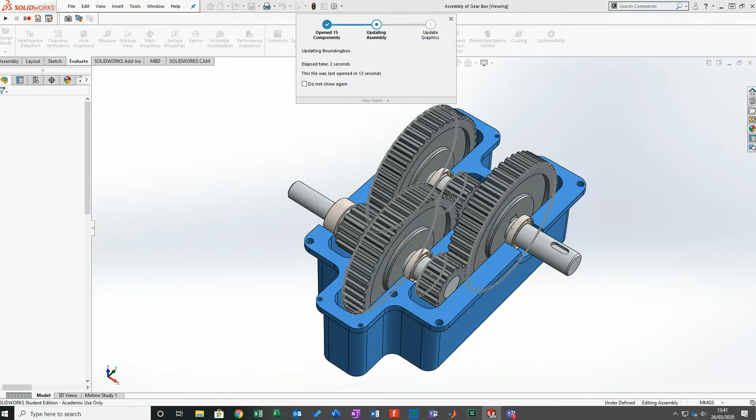It's just so you know the model's there. What I'm going to do is open this model. I'm going to show you this gearbox - it looks worse than what it is, so let's just take a look at it. It's one I saw this morning, and I thought, yeah, it's not bad, it's actually a decent example. There's a few bits that I kind of thought, oh no.

So first things first, what I personally do with these, and what I did this morning, was look at it - we have the bearings. Obviously with bearings I'm going to drop all my bearings off because I don't really need them, so I'm going to hide that.

Then we've got the housing. We can stick the housing in afterwards if you want, but it would only ever be for aesthetics. So what we've got now is the basics of this system.

We've got just the gears, we've got the keyways, but you'll notice the shafts have a way of interfacing with it. What I'm going to do is build each one up, and we're going to have to essentially tell the system that these two parts are not one part - they're actually two parts working together in a single assembly.

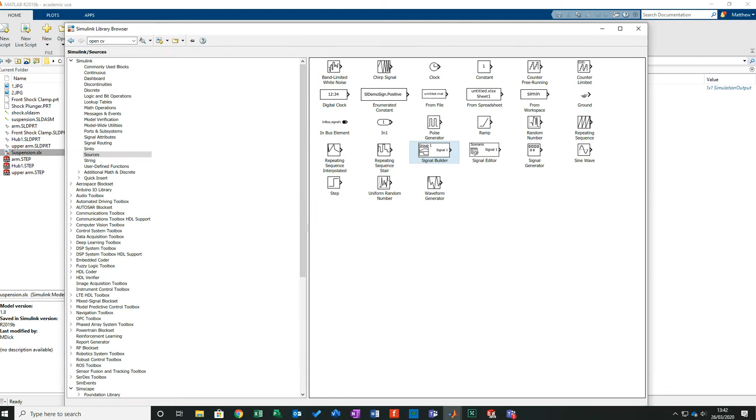So first things first, I'm just going to come out here and pop that there for a second. I'm not going to give you that one just yet. Like I said, I was working through this morning, and I think I've come up with a nice little way of delivering this to make everyone's lives so much easier.

I hope so anyway - you will become an ultimate expert at rigid transforms by the end of this, I promise you that. So I've got the gears, everything's all in here. All these lower steps we've actually got already. I'll explain where the PCDs have come from, and by the end of this I'll upload everything here so you can have a play around and see what you think. But these gears are really useful - I found some fascinating things this morning actually.

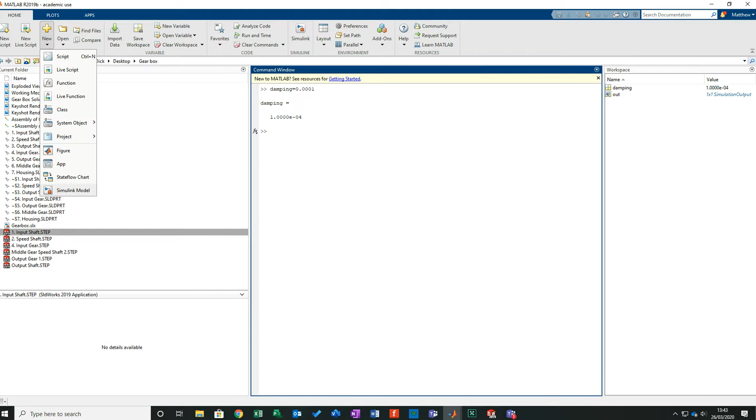What we'll do is start a new one, so we're into a new part. Again, if you're after these models and want to follow me, you're more than welcome to download the parts. So I'm going to go as normal, library browser, scroll down, and all I'm going to do at the minute is start my world. Let's go on to there - start my world. So I'm going to go to Utilities, and as ever we need a solver. I'm going to go to Frames and Transforms, and bring in a World. As ever, this becomes our base construction area.

Coming back up on the SolidWorks model, I'm just using this as a map really, just for me to see what's going on. I'm going to start - if I click on here, this is my output shaft. I'll probably start on the output shaft, because in my example I thought I'd spin up the output shaft to see what input will be needed to get a value I'm actually creating here. Thought it was just something different - we can do it the other way around if you wish, but this allows me to do that.

And then what I can do is look at what happens if these gears become jammed, if they've got mass levels of drag on them, if there are major issues coming out of these - we can do all sorts. So that's what we'll do, and let's pretend for this example that we're looking to try and find any abnormalities that occur.

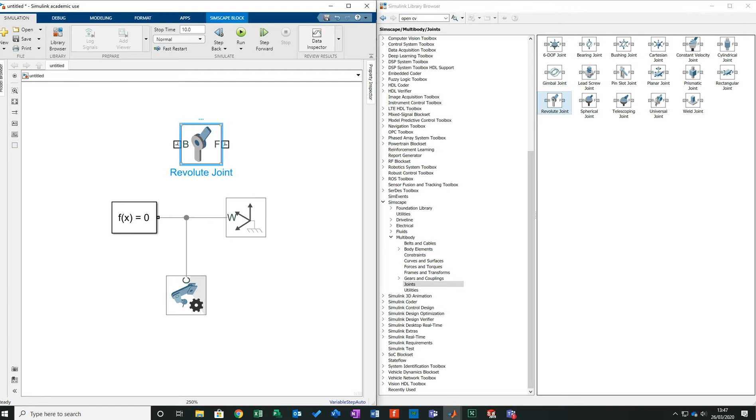I'm going to drag and drop a Revolute joint, and we're going to start with our output shaft. Snap that in.

What I'm going to do is build to there. So I'm going to go to... where are we... bodies, and I'm going to bring in a solid. Then what I'm going to do is bring in that output shaft. Double click into the output shaft.

And what we're looking for is the slot and the keyway. There we go, that's our output shaft. We need to see that there are differences, because don't forget we're going to bring these parts in for the first time all the same colour, and they're going to be swallowed up. We need to be sure that we're looking at the right stuff. So I'm going to decide all my shafts will be blue.

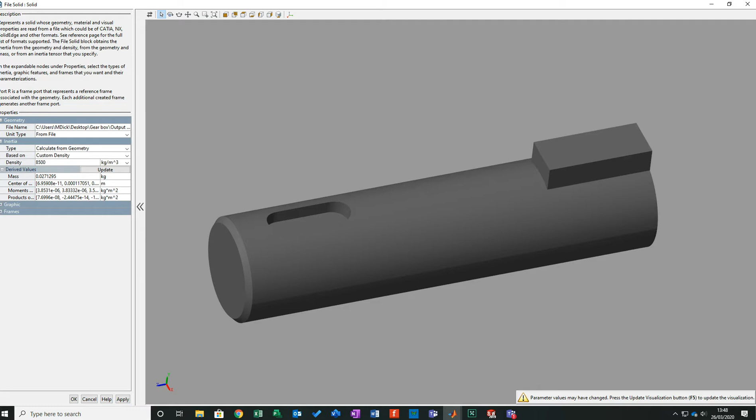My inertia - sorry, I'll go custom density, and I'm going to go 8,500, not 85,000. And then go graphics, and I'm going to change that to blue. Any blue will do, it's just to have that difference.

And I want to look at my reference points, look at my frames. You'll notice that on the keyway it actually does have a point already. What I'm going to do is select the end face and create myself a point there as well, because that'll allow me to give a point, an origin, a reference to start building from. So I'm going to go frames, add in the frame, and we'll go main or something like that. It just gives me a point to begin my referencing.

So I go select. Because the way that the guy has drawn this, he's actually done a pretty good job - to be fair, he would pass in his assignment. If I click save, and then apply, and then OK.

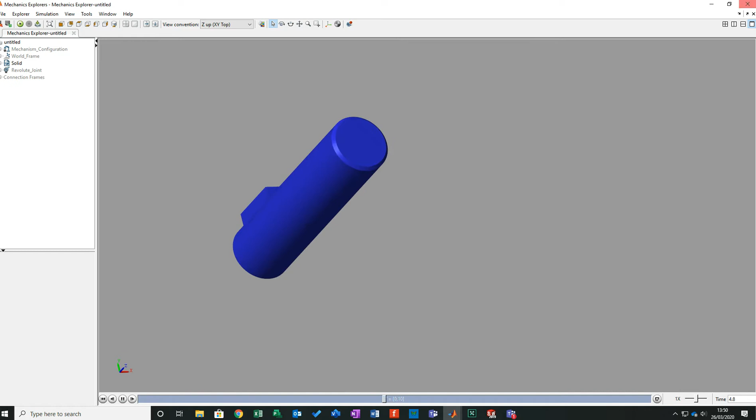So what we'll do first is we'll flip it round, get this connected. As ever, I just want to make sure that there's nothing that I've missed there. Just going to run it in. As you'd imagine, there's nothing going to happen - there's no activation, no real rotations or anything there.

I'm going to move my gravity into Y and shift that there like so, and bring that down.

Now what I'll do is bring in the gear, and then we're going to look at why it's wrong. It sounds really bad, that, and I don't mean to make it sound like that, but we're going to bring in the gear and just have a look at why it's actually going to be wrong. So I'm going to right click - sorry, double click - and go to what is actually gear 1.

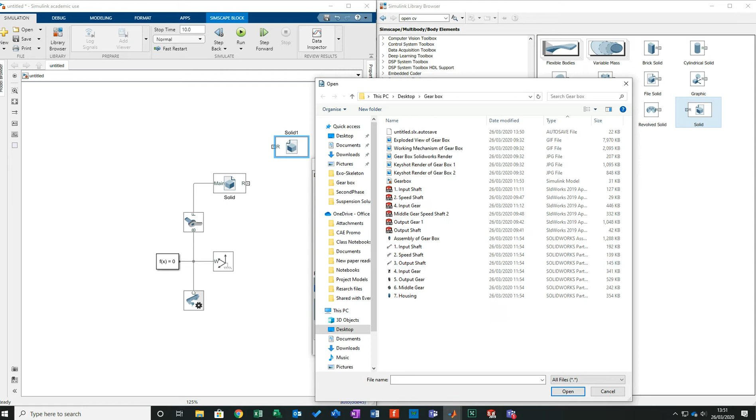Let me go to details. Just want to sort this by type - it's irritating me. Sort by type. So I'm actually going to go output gear 1, F5, and bring it in. It's our gear.

I'm not actually going to change the colour. Big gears I'll leave, small gears I'm going to have them as red, so I've got a nice overview of what's happening. And I'm going to come into my geometry here. That's actually fine, and then all I need to do now is just update my densities.

Everything's set to that with mine. I've automatically set it like that. You don't have to, but I've done it like that just because I got sick of it being set to water or air. So I'm going to set that like that, and then I'll just call it big gear.

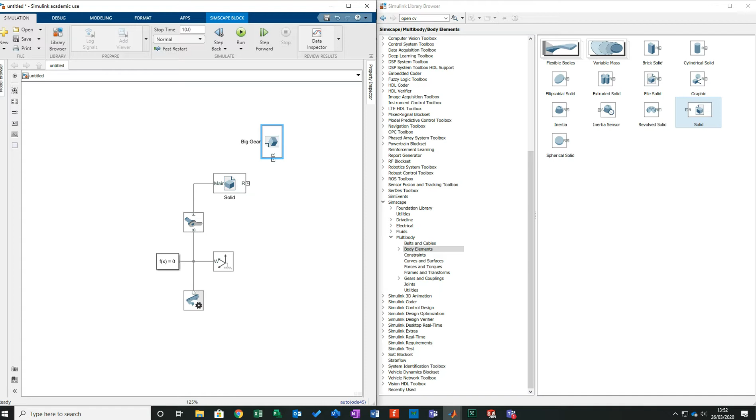What we're after doing is setting up the first relationship between it. Setting that relationship will make life so much easier for us. But first things first, let's connect that up. And I'm just going to hit run.

Now let me have a go. This tool lets me toggle center of gravity. Center of gravity on this is referring to this being a central part, as one piece. Really, each component has its own center of gravity, but these two work together. So what I actually want, for a bit more accuracy with this, is for these two to be separated, but not lose that relation, if you will.

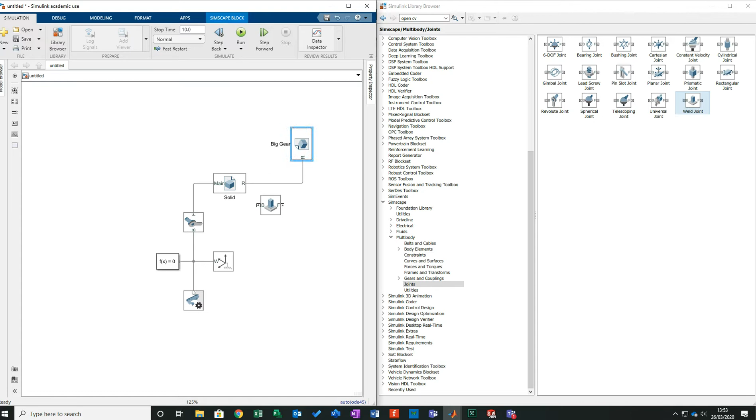So I'm going to close that, and in here, I've alluded to this a few times, I don't know who's used it yet. I'm going to use a weldment, a weld joint. This literally just allows that centre of gravity to still be representative within each component. So if I run it again...

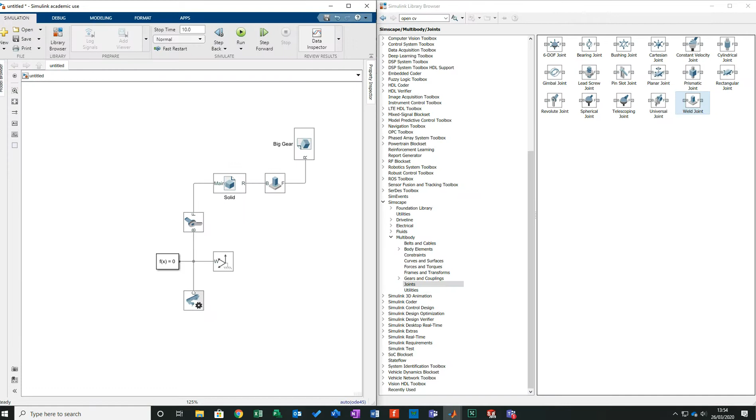God damn it, there we go. Wow, that's actually not showing me anything now. Brilliant. In essence, it should allow me to at least see the difference that they're sitting there, but it didn't actually show me that, which is a pain in the arse. Anyway, doesn't stop us from moving forwards.

Bring this back a little bit more. Right, so we've got the big gear in position. Now I'm going to bring in the gear tool. So let me just find it. Where is it? Gears, yeah sorry, yeah, gears and coupling.

Now what I'm going to do is I'm going to use a common gear constraint. This refers to just a gear and its relation. So there's a few ways of doing it. I'll show you how I've done it, it doesn't mean it's the only way you can do it, but I'll show you how I've done it.

So first things first, you got to go into what you're looking for. So I measured both of these, the big gear and the little gear, both mid and large gear. This one, PCD, actually measured at 58.5, and this one measured at 18.5. I think I did a slight mix up on there, but it's nothing that can't be modified.

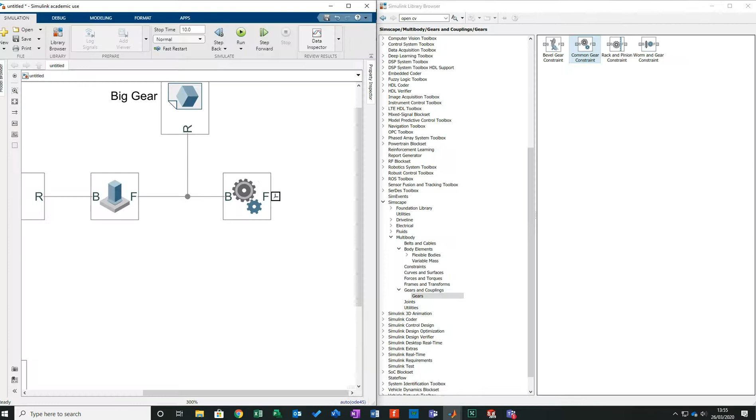So what I mean is, if I come in and type, we have two multiple choices in here. We can either go external or internal gears for planetary gearboxes. We can go center of distance to the ratio, so center of distance between the two, and then the ratio of the gears, or we can go pitch circle radii.

So we go the base gear. In this case, it's the big gear that's following. So all I say is 58.5, and because it's after the radii, not the diameter, I go over 2 in millimeters. Repeat that process again, we're going to go 18.5 over 2 in millimeters.

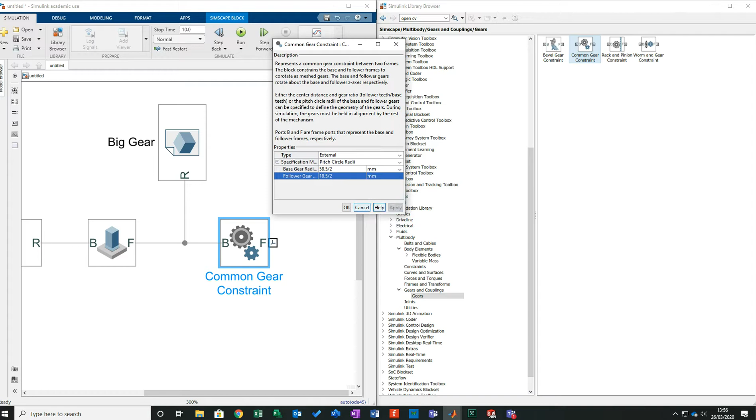Now I get dead excited with all this, I really do. Is there any questions on this so far? Anything that you're unsure about? Anything you want me to do again?

Good, right, okay, so let's move on. As ever, if there's anything else we're going through, stop me, make a comment. Honestly, I don't mind, I prefer it. It promotes just discussion, and that's what this should be really about, just the discussion.

Now the configuration I've got here, I've got the same. So I'm going to right click and just drag across. Might as well, it's going to work to my advantage. And I'm going to rename that small gear. Double click in, and within the small gear...

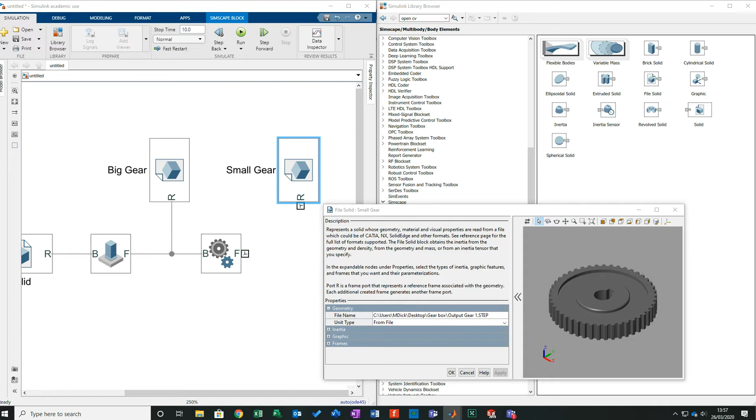Let's have a look, what was it called? It's called middle gear speed shaft 2. Apply, let's have a look. F5, there we go, right.

Now again, there's relationships going on between the gears, between the shafts. What I want to do is change this colour, or else I'm going to lose a lot of what's going on. So I'm going to drop that, drop to here. And for me, as I said before, I'm going to change that to a red. Click apply, F5 that, and set and apply. So we've now got that.

We're operating with some level of decency with it, which is happy days. If we just look at the R, it gives us that origin, so this is quite nice. We've got a measurement between it.

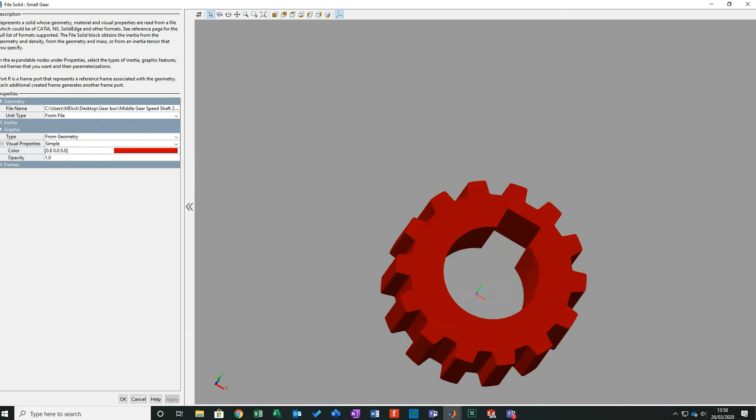What we are going to have to do is translate this back, if you will. So I'm going to just bring this in. Don't run it yet because it's still going to crash. There's no real definition of where this gear sits in space, so it's going to have a bit of a meltdown.

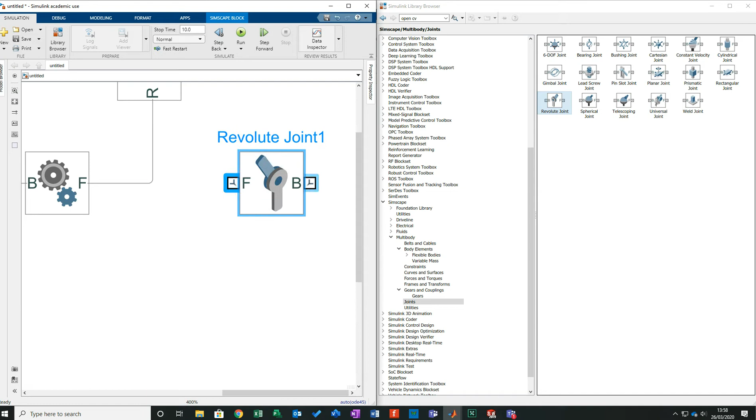So I'm going to go joints, and I need to close this joint. So I'm going to go to Revolute joint, bring that in, and zoom it and revolve. Bring that round, pop it in in relation to here, and finally...

Like the piston, like the suspension, it needs to be able to find its home. If it can't find its home, it will have a model violation. So what we actually do is we need to translate these offsets back along here. However, the other one is on the gear itself, we need to translate this shaft, because if you remember, we were using the end of this as a measurement. So I'm going to measure between here and here.

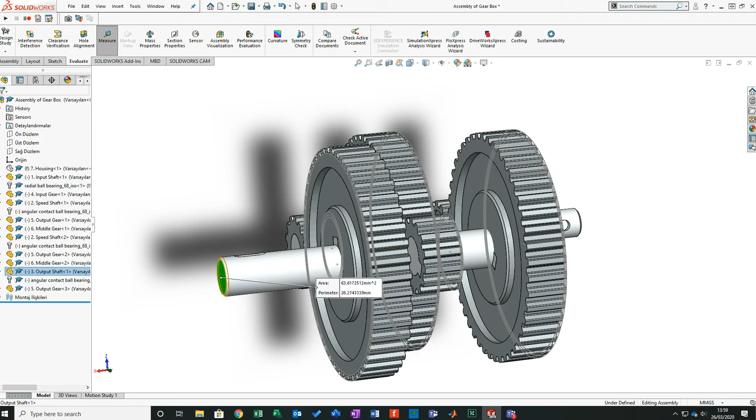Then if I bring in the normal, distance of that is 40 millimeters. So then it tells me that I can translate that 40 millimeters back. So let's bring that translation back, and then what we'll do is we'll move on to the next layer of gears.

Now, one thing you should be really starting to notice is these gear constraints are only used if there is direct connection between it. If you're in first gear, it's not going to be working, so it's not got a relation. So then the drive behind this becomes the main shaft, not the gears. So this becomes a configuration. Like I said, to run it in first, second or third, it's a configuration of them gears, and that's why this assignment in particular is quite tricky, because you're moving stuff around so much. As I've said, it's not a straightforward thing.

So I'll go frames and transforms. I'm going to go rigid transform, bring this back, and I'm going to rotate this. So rotate it round. I'll drop it just beneath and tab it onto here.

Now, the one thing that I realised this morning is so delicious, it's amazing, honestly. One thing I realised this morning, and it's what I'm going to take you through in just a second, is this relation is almost copy and pasteable. Once we get it ideally set up, you'll look and go, oh my god, this assignment actually is a lot easier than what he's told us it is. But it's not, it's still got difficulties in it, but that's where it is.

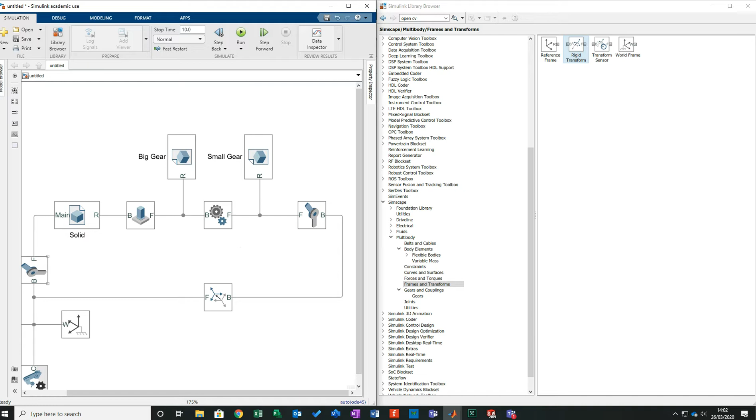Just to get it running, I'm going to go on to my Revolute joint. I should point out this is only the first layer of gears, but this velocity I'm going to put in is what's going to actually power the entire thing out, and I can look at the input shaft and see what type of torque I would need to actually get that out, if you will. So I'm going to go 1 rev per second and then run.

So now this gear's running. We've got this gear.

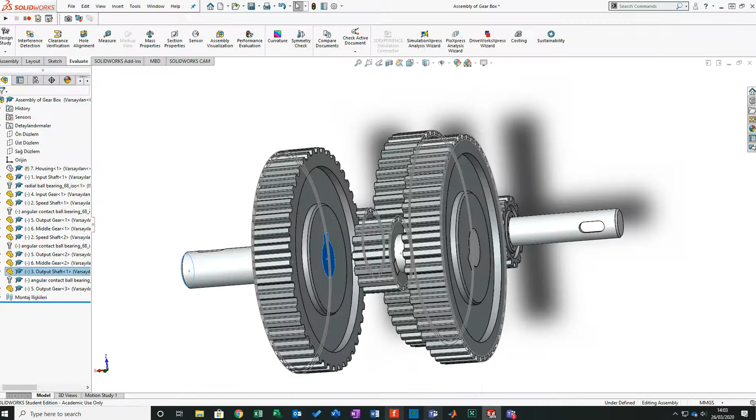If we're going to relate this back, where we are now is we are here. So we have here, we have this, we have this. Now we've got the speed shaft. We've got to put in the speed shaft and then get this relation.

This is not as straightforward as I was hoping it was going to be, actually. It turned into a bit of a pain in the backside. But it's not a biggie where we can't sort it. But this one bugged me a bit this morning.

So what I'll do is go back to my actual model, and I'm going to add a connection here. This is purely because... excuse me. This was purely because what I wanted to do is, I'll just put this input shaft, output shaft.

Just change that to output shaft, give me an indicator. And if anybody downloads this, at least they'll be able to follow exactly where I'm going with this and where it's come from. So my output shaft.

Now with here, I've just realised I've actually not been deleting my frame set, so I'm just going to delete all my frames. It's because this model is going to get big, and it's not like the suspension that we can just get away with it nicely.

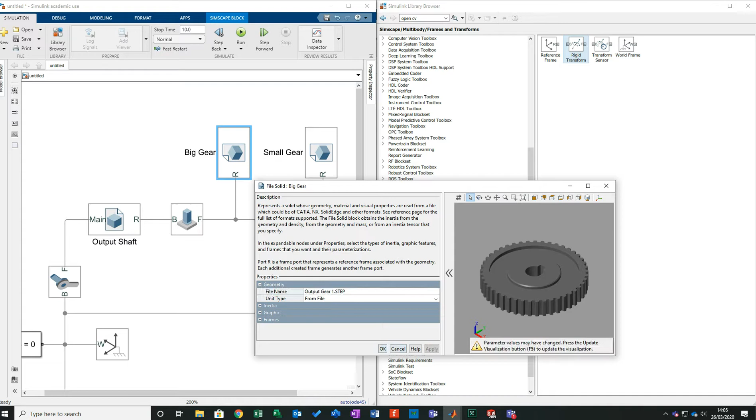We did talk about sorting out the output shaft, so I'm going to go damping. See where we got damping? So if I type damping, I'm going to set that to 0. So here, in here, my initial states, my initial mechanics, I'm going to type in damping.

And it means I've got an overall governing thing that'll allow me to set it if I need to. Got damping and damping. Right. So, next piece on here.

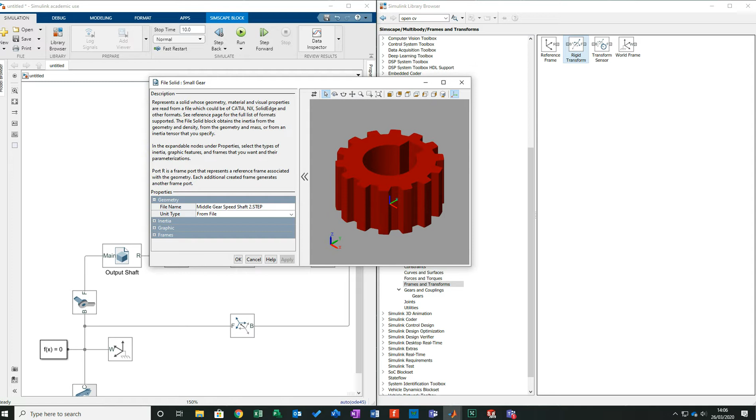We're going to come back into the actual gear, and I'm just going to have a look at where the origin sits. I need something up here. This is purely because it's going to be how the gear is going to connect with the output shaft.

You'll see in just a second why I've done it this way, because the way it actually sits in the simulation at the minute is like that. So if I connect these two together, this is where the output shaft's going to be when it needs to be over here. So I'm just doing it for alignment reasons. So I'm going to add in on this point here, and then add, I'll just call it connection.

Use that as selection. Z's in the right component. Happy days. Apply and done.

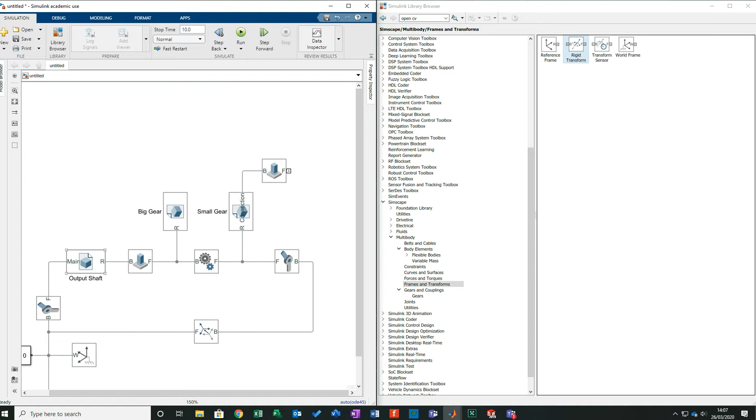So now, this is what I discovered this morning looking at this and looking at this. It's absolutely delicious, it really is. So I'm going to drag this over, connect that up. I'm going to drag this over and connect that up. And I'm going to drag this over and connect that up.

And just as a start, what I'll do is we're just going to change the shaft now and put it out to the speed shaft. So we're onto speed shaft, and then if I F5, that's onto the speed shaft.

Just want to make sure that my speed shaft has got the origins correct. It doesn't, which is a bit of a pain in the backside, but it's not a problem.

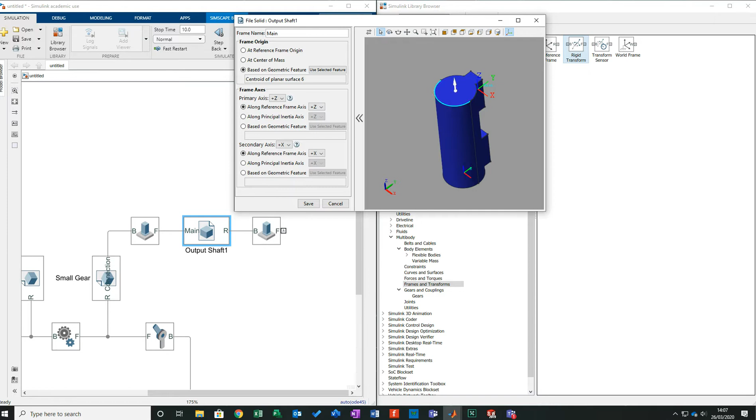So what we'll do is go into our main connectors, and we're going to come down here and select this edge, and then apply, save, run, run. Now what I'll do just to make sure that this is working is run.

I need to tidy this up because it's actually giving the wrong impression completely. We need to tidy up the actual run anyway, but we will get to it in just a second.

Right, so, and then from there, what I can do is come in and now bring in, now bear with me on this, now bring in another big gear. So I'm going to bring in another big gear, connect it up,

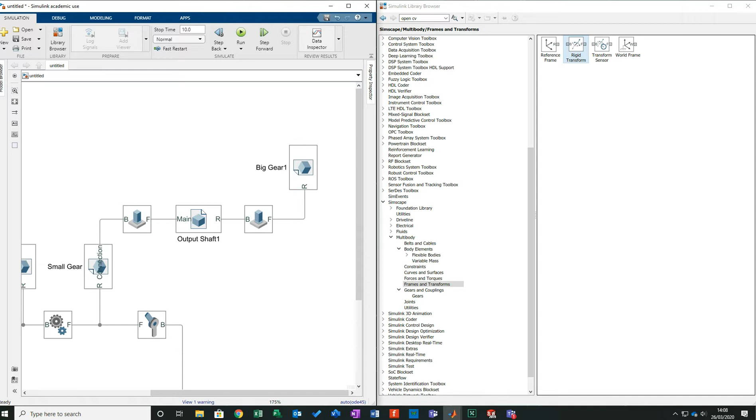because if I come back, if you have a look, we're here, we've come along here, we're here. We have a big gear and then a small gear. So it means the translation has to be different, but we can fix that. It's not a big issue.

Now this is pretty cool. If anybody got annoyed with the piston, this was a little personal finding this morning. I realized, wow, it's obvious you can do this, but I didn't even think about it. This rigid transform translates home, right? What if, instead of translating home, you translate to the next rigid transform, which translates home? In essence, making like a train, if you will.

So what I mean is, if I bring this across... choo-choo to success. I'm going to bring that in, connect that up, and then connect this up to here.

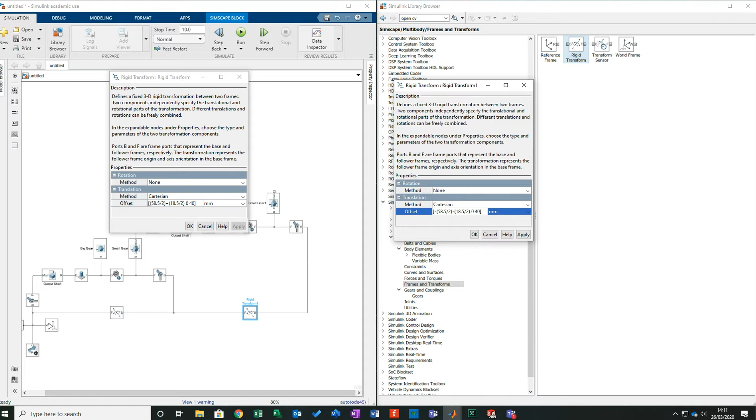What I'm actually going to do is say minus, and minus. What that'll do is translate it the other way, but still residing on this 40 millimeters. Oh, that nearly went wrong. That would have been very embarrassing.

So if I come back, we'll go measure. I'm genuinely measuring this now because I forgot what that value is. So I'll go here, and bring it back across. True value of 30. Okay, so we come back, go translation, and we'll use the true value of 30. Now we need to see if this is right. Might not be, but I'll check it.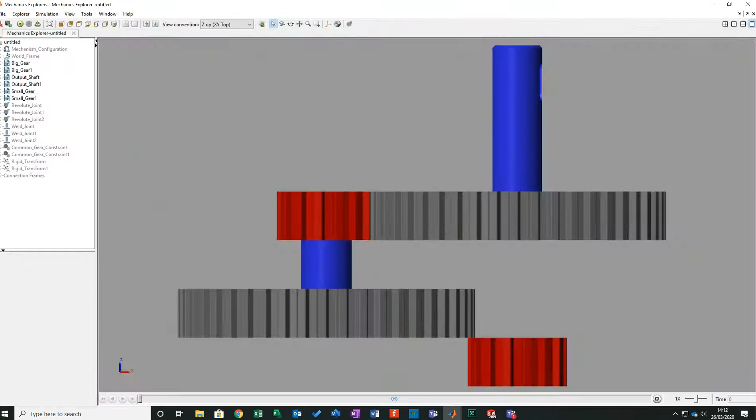It's not. This translation here has gone wrong, and that's a 10 millimeter translation. So what I'll do... oh yeah, violation. Yes, I know, it irritates me sometimes. If I bring that back and go 20 millimeters, then apply - it's just taking into consideration the thickness of the original gear.

What we can actually do is copy and paste. We can make that work to our advantage, which is sweet. Very sweet. So let's get to the next piece.

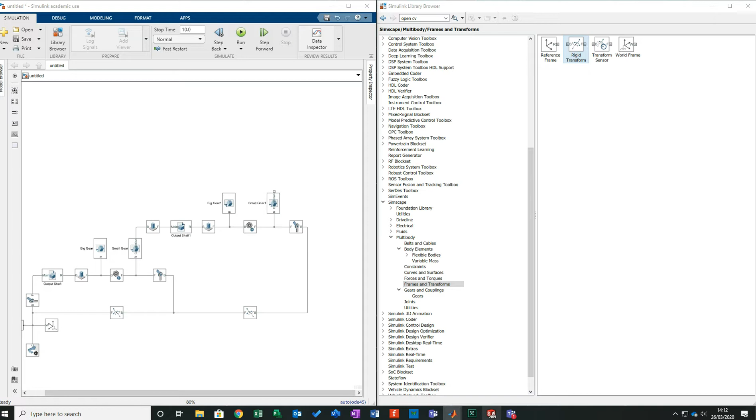Now, moving along, we've got one more layer to construct. We have here, and we're going to go here, this, and this. Now, these two gears, the input and output shaft, are actually different to everything else, as you'd imagine, so we need to be aware of that. But we'll construct to here, and get in the next big gear. I'm just going to minimize that, and then come across.

Right, so what I'm going to do is bring in these, right click, bring them across. I should point out, just so everybody knows, this isn't the assignment. This is just a gearbox that I found this morning, and then I rigorously checked to make sure it wasn't a load of crap.

And it's not so bad, it's actually pretty good. Then emulating the exact same process from here, we're going to bring that across and then connect up our next gear.

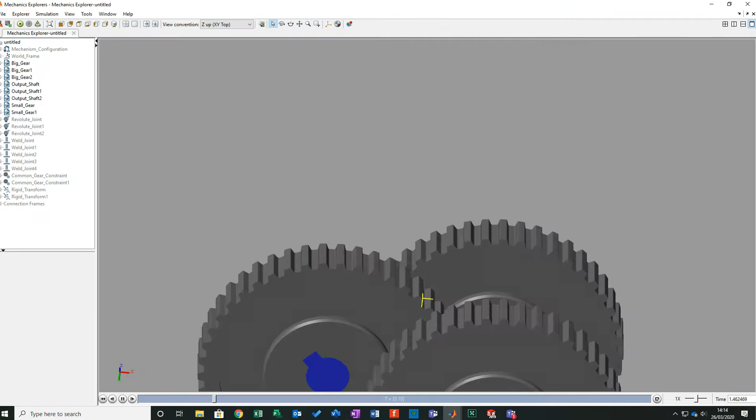So let's just run it, see how it looks. Oh yeah, you know. We do need to tidy this up - it's all over the place, but we can fine tune this as much as we see fit. So on a big gear, then we're going to move to a little gear.

So again, I'm going to copy that in. And ironically, getting these relationships working right is probably a little more tricky than the Ducati. I was playing around with the Ducati this morning after I got this one nicely working and thought, oh hell, this could be a bit more tricky.

Right, so I'll go to my small gear. And if you remember, on this small gear now, this is our input one - it's a different one completely. And this is under... hang on a second, what did I actually call this? Well, not what did I call it, what did he call this? He called this input gear. So I'm going to go input gear and F5.

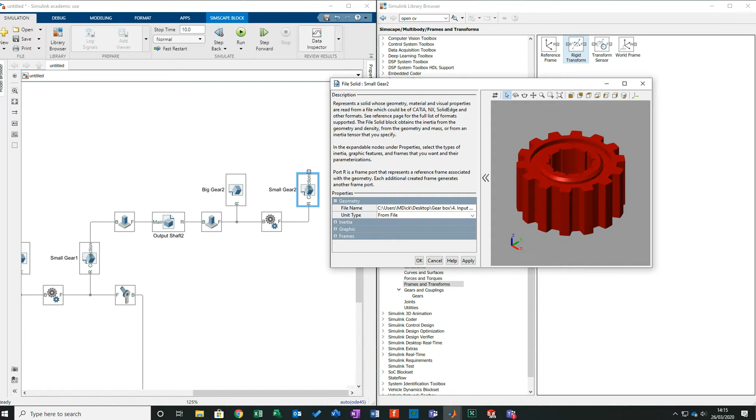Let's just check where our connections are - yeah, that's just wrong. So I'm going to go to frames. Don't forget, this is a new type of design, that's where it's come from, that's why we got that. So I'm just taking from the top edge, just to give it that position.

Use that selection. Then we'll go save, and now we've got a good connection point for it, which is great. So go apply and apply.

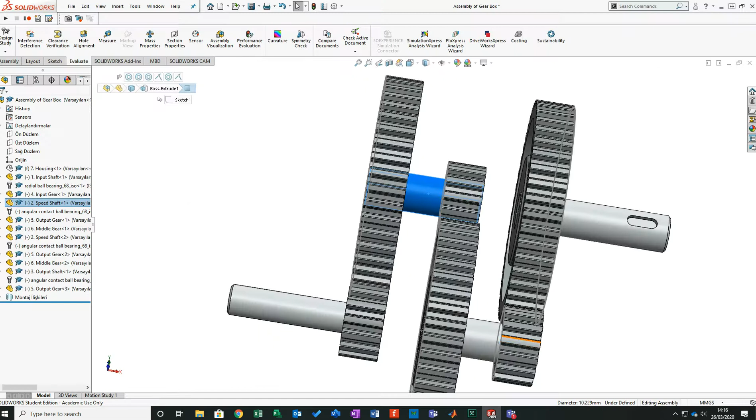Using this idea of translating from gear relation to gear relation, we can now connect these up. I'll right click and bring that across, because the relationship now moves backwards. Keep in mind we constructed this by going here, doing a counter, then coming back again. So it's the same relationship as the original one we created, and we can just copy and paste that straight in.

I can right click and bring in a final set here, bring it across, tab onto there. I just need one last piece now, so connect up to here and bring across. Whoops, that was me left clicking. I'm going to bring across and punch that into there, and this now becomes the output shaft.

I just realised I haven't been deleting the reference points, so I need to do that. Let me check my referencing. Main sits there, I think R sits there as well, looking at that. Does R sit there? R does sit there. What I'd like to do is remove that and go with 5.

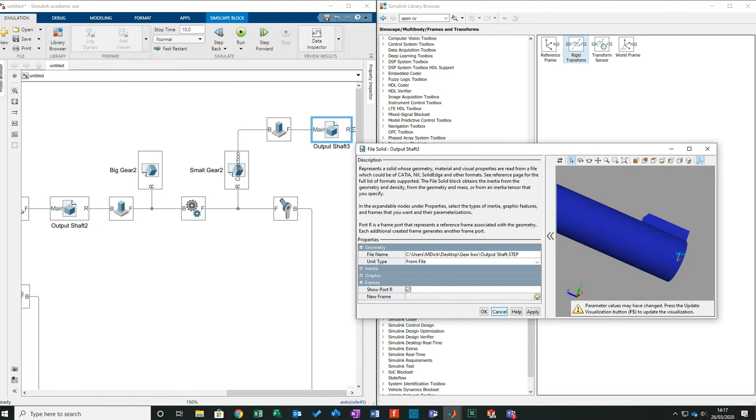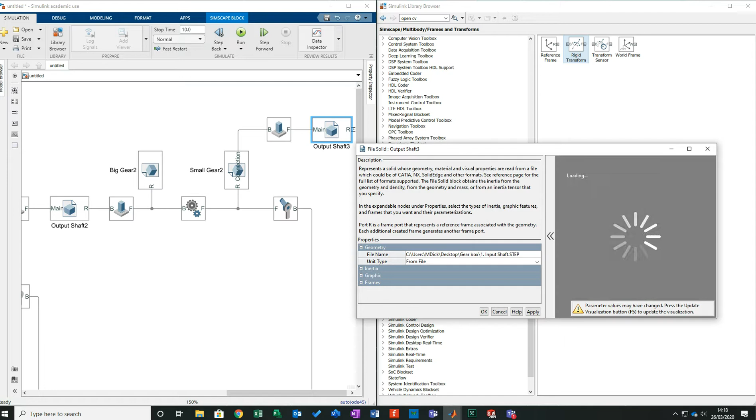Oh, hang on, that's wrong, that's me choosing the wrong one. Damn it, it's the input shaft I was after. Sure, I selected input shaft. Input shaft, so go on input shaft. I was just thinking, because the gear we've just added is toothed, so I'll go on to here. And there we go, we have that toothed area.

If I check the references now, that's a little better. Not perfect, but better. So I'll go into main and centralize here, because that's what we've been doing, using that as a key point location. I'll go apply, then OK, and just as a test, let's see if this sits in the right position.

Shit! You sure it doesn't? So what did I do? That's what I did wrong.

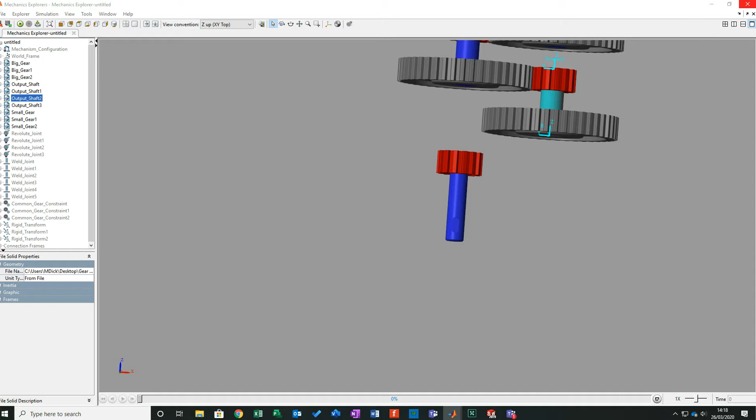The last translation, if you remember, I copied directly from the other translational point, thinking that'd be fine. So if I double click into my other translation, I'll drop that to my 20mm, which is the measurement I took from the smaller shafts. Then if we hit run, it should give us a running gearbox. Like that.

So it's a good start. We need to tidy this up a bit. Is there any questions on that? Has anybody not got this running? Has anybody got their gears going crazy? Because it can go a little bit crazy when you're getting it running.

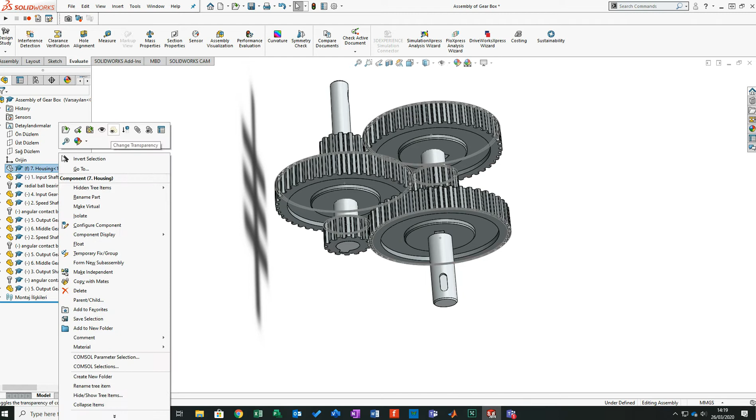What we can do is easily add the housing, but again it's just aesthetics, it just looks pretty. So assignment wise, if this was the assignment, really you wouldn't add that. Arguably, if you wanted, you could even add in the bearings, but again we have a representation for that. What's important is that we suspend that shaft in the correct position. So we've now got that as well.

Everything's now really there. So if I minimize that and maximize here, I come in. What we've now got is layers, if you will. If I split this out a bit, all this here is our first layer of gears, we get to second layer of gears, and then third layer of gears. Essentially we used multiple rigid transforms to transform all the way back home, using the same orientation again and again, just inflated as we went along, which is ace.

First things first, I'm going to offer a bit more resolution on that, again it's very tight. So let's come in and go into the solver. I'm going to make it tighter and go double of its initial.

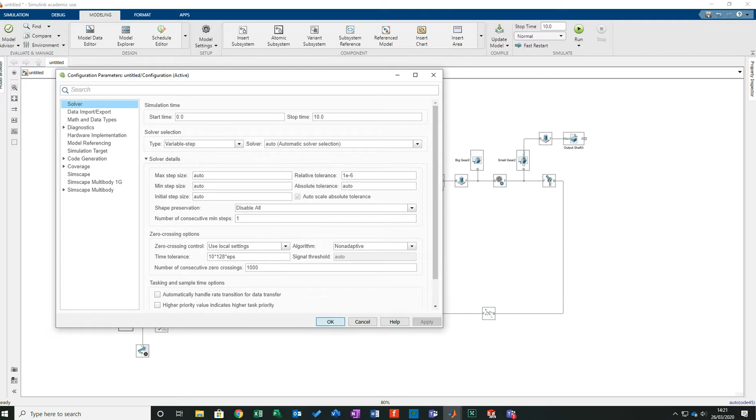Come back, and I'm going to hit simulation and just run it again.

Right, so we're now looking at the overall finish.

Right, 2 minutes, I'm going to kill my cat. I'm not going to kill my cat. I'm not going to kill my cat. I'm just going to go sort my cat, it'll be 2 seconds.

Right, so back at it. What we're going to do is check the torques that are coming out. I think more particular here, I'm actually interested about what's occurring here, and about what will happen if I change things. I'd like to know the speed it's moving at, so we'll do some angular velocity or angular acceleration, or maybe position or an angle check. Let's do an angle check, and then we can try to build up a scenario of what this would look like.

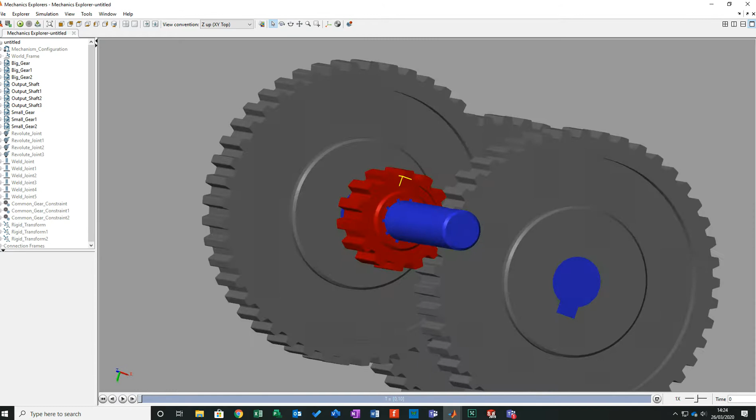So if this was the example which I'd set, where we're trying to... Now the way that it's looking, Damien, is just aesthetic, and it's purely because if I run it, if I bring it back, they actually don't. If you look at the way that they're looking, they're actually sitting embedding here. But if I essentially get the starting position of this to go by, I don't know, 2 or 3 degrees, it will just put it in sync. Now the reason I've not been fussed with it is because this system will predominantly focus itself on the values that we've added, so it's purely an aesthetic thing to give us what we're looking for. Imagine if you were using this software and didn't even have that running - that'd be a nightmare.

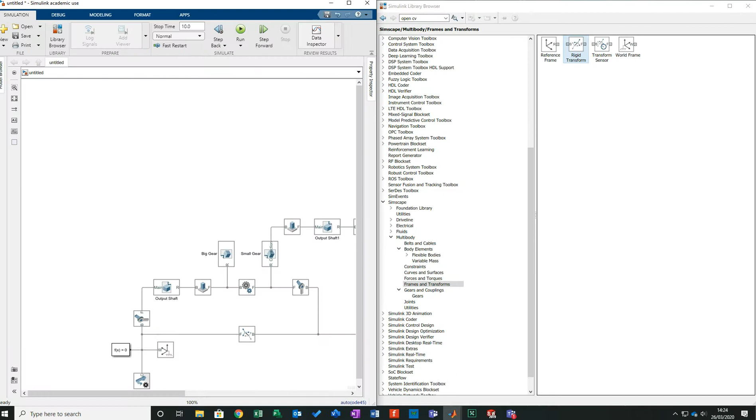Right. So, I'm going to use a transform sensor. That's going to allow me to track the speed of the output shaft. Then what I'm going to do is bring in my world, obviously because I just need that reference point. I know for a fact I'm going to use a PS-Simulink converter, probably multiple times. I'm going to need a scope, because we've used that quite a bit now, so I'm going to bring in a scope.

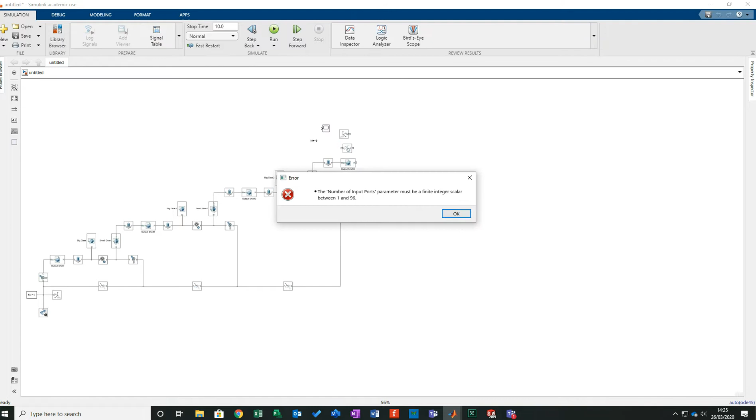And for this, at the minute, I'm just going to stay with that for the moment, just for the minute. We're probably going to need to add more and more as we're going through. So I'm going to go here, and then I'm just going to tab, probably from here, and then - let's complete that first before I get myself tied up. So, I'll put myself a world in, and that world just gives me that reference point that I can tag onto.

So, I could take an angle. Give me rotation on the axis. Let's take a look at them. In essence, we want to see. So I've put in 2 revolutions per second, and what I actually want from this is I need to obviously convert it out.

What was it? What were we at? We were at 1 rev per second. Might have an issue with that because I'm just trying to convert it really.

Right, so we bring that back, and now just running as normal. So obviously that's what you should be getting, something that's relatively smooth that runs like that. Then let's take a look at what it's revealing.

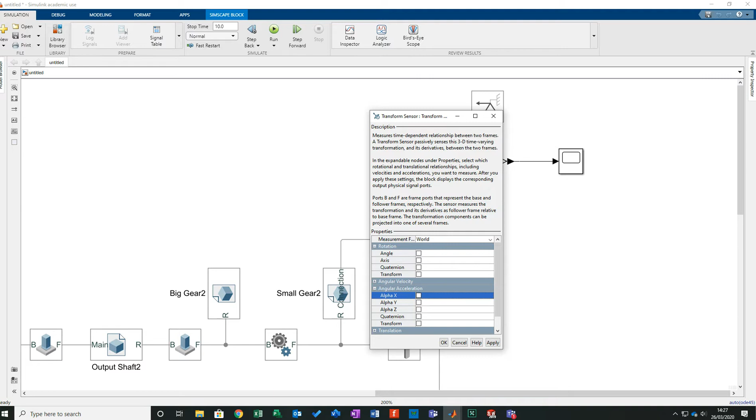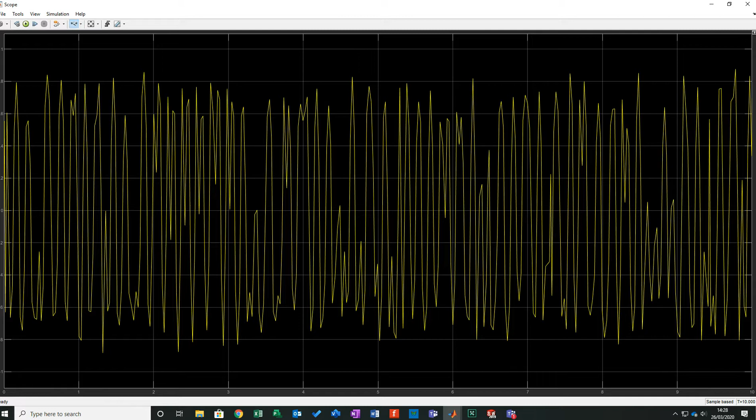Pull into inherent and just see, because it's now in a different... right. Let's slim that down a little bit and go from a single second. Yeah, we need a velocity on that, don't we?

So the issue that we got at the minute - that's more like it. So you can see the initial build on it that's coming. Now these are all so all over the place. There is no damping in this at all. It will just provide almost 100% of what it's meant to deliver on.

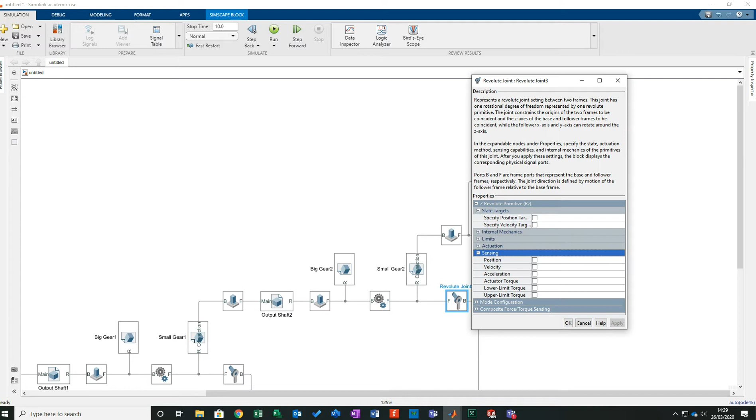And what I actually want to do is I want to look at this. I also want to check on this torque here, because this is my outputs, and well, actually my input. So I'm going to go to sensing. I'm going to bring out my total torque. Oh, I can actually bring out position there - that's quite good, I didn't think about that. Bring that down completely, come into here, and I'm going to bring out my total torque.

No, it doesn't. What it does is, think of it as if you're measuring - say if you're dropping a mass spring damper, and you're just measuring from the home of its position, and you're wanting to measure the actual mass itself - what the second world allows it to do is to give it those two initial reference points, so you've actually got a point for a real measure. You can go absolute or non-absolute, and that's all it really is. It doesn't really set as an origin. It's just because this is how I've initially constructed it, basing this from that reference point, and that becomes my ultimate world spot, and that's where that's coming in, and that's where that's been really introduced.

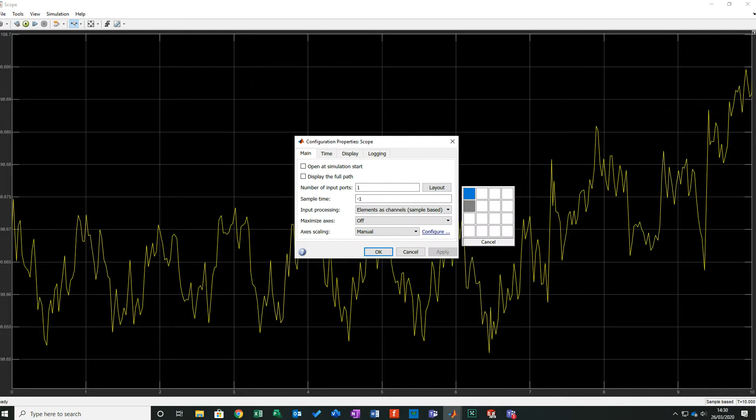So I'll come onto here, bring that down. Bring that across, and then apply, and then close, and connect that up as well, and then run.

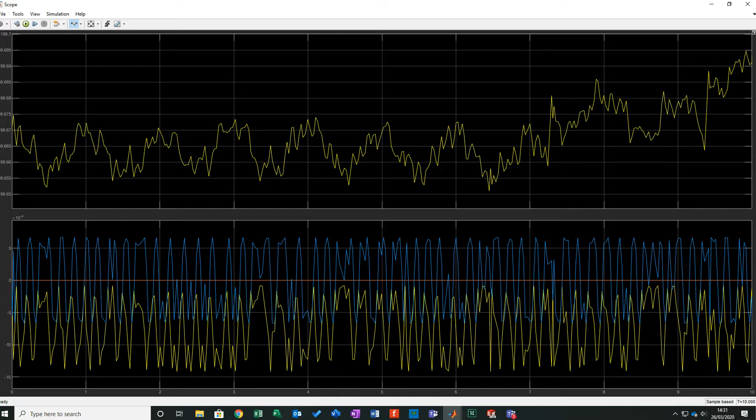There's practically no torque coming out on that. You look at the combinations between the two, 10 to the -4, there's not going to be much there at all anyway. All we're simply doing is grabbing it from one side, rotating it at 1 rev per second, and then it's giving us the output.

In essence, we could take that sensing position and use it as a feed, to feed into something else if we wanted. Really, with this, it's almost a way for me to cut it off, to stop it. We don't have to stay in that position. We can use that follower for something, to feed to something else if I wish. It's just a nice way for me to tab off and look at the output results it's generating.

But yes, no, you're absolutely right.

Right, so if I bring it back across, what I'm going to do from here is go into my MATLAB, and now I want to start looking at this under a level of damping. This value was one that my professor, Ian Sherrington, always referenced to us as a good initial starting point to start designing your bearings.

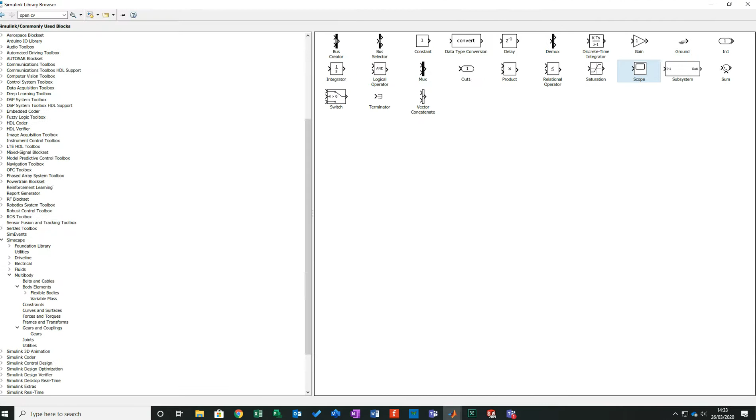So if I hit that, now there are new tools here to allow us to consider a lot more frictional force, which is great, because initially we used to have to model these and build our own blocks for it. They've recently introduced that, which, if anybody's interested in the wear, the tribological side of this, these tools here are brand new.

Brand new-ish. Here we have contact forces, frictional forces, and some level of method for the interface. You can use Navier-Stokes, feed that in through a method of your critical forces, your critical static friction, your dynamic friction, or your critical velocities, whatever it is. You can feed it in that way. It is useful, it still needs a lot of tuning, I think, but it's one step closer.

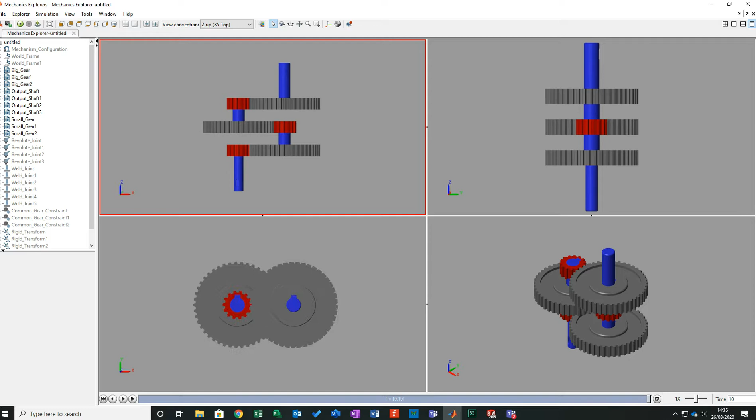Yeah, I know it is, Damien, I know it is. Building Navier-Stokes on this is just 10 short of suicide a lot of the time. Building it's just absolutely mental.

Right, so this suggests that under the present state of conditions we're running at, this level of damping that's present has actually left it solid. Am I even running at the right values there? So, 4. I'm just going to drop it down.

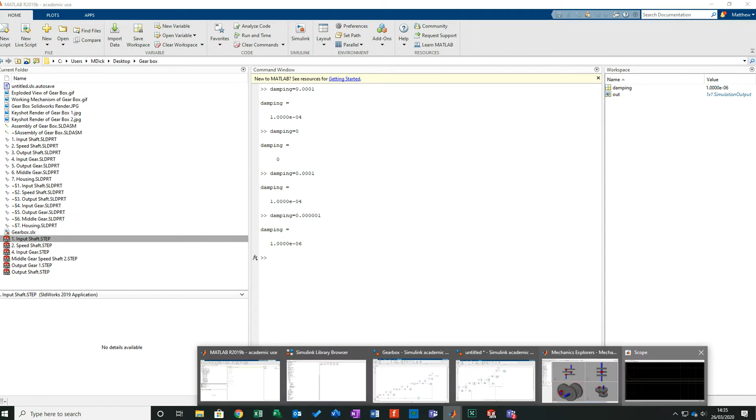Look at that. So if I come back in again, see how we're here. Now the damping on this is so great that it's actually overwhelming it. I forget though, it's actually quite small, isn't it, this? So if I drop it even further, it's practically running at hardly anything now.

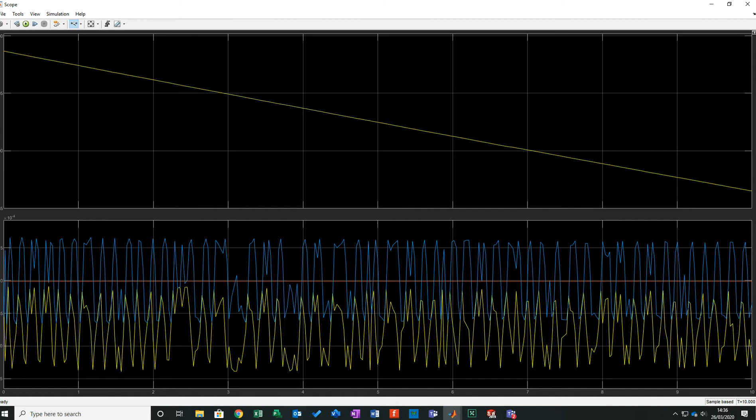Now if you remember, that is our angle offset. It would suggest we'd need to run this a little bit longer. What we're getting is still relatively low levels of torque coming out of that, which is surprising. So I'm just going to bring that back in. And even still under a shorter element, it's quite small, is that.

So if I run it again. Look at these torques—the damping is actually overwhelming it. Now, arguably, is the positional tool that we're using restricting this? Not restricting—is it not really giving us what we're after?

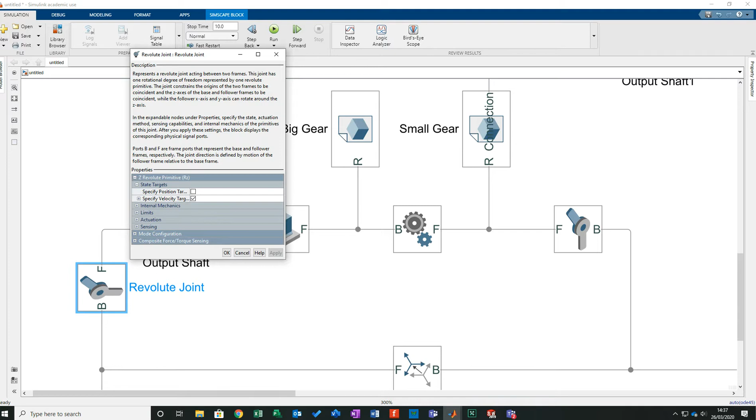So if I go back into here, what I'm going to do now is go back onto my joint, because I am starting to get some interesting results. I'm going to remove the target velocity, go into actuation, and just feed torque in—go provided by input.

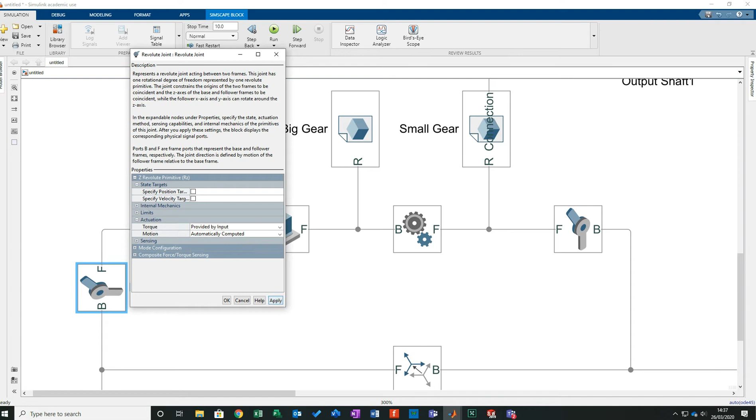So let's say we've now got something feeding into it, and now we're going to drop in a little bit further. I'll come on to here, and now what I actually want to see is what happens if I do a signal builder. As I've said before, a signal builder's great—I can choose a continuous value or variational values, and that's why it's always my go-to tool. So we'll bring that back, tie that in, and double click here.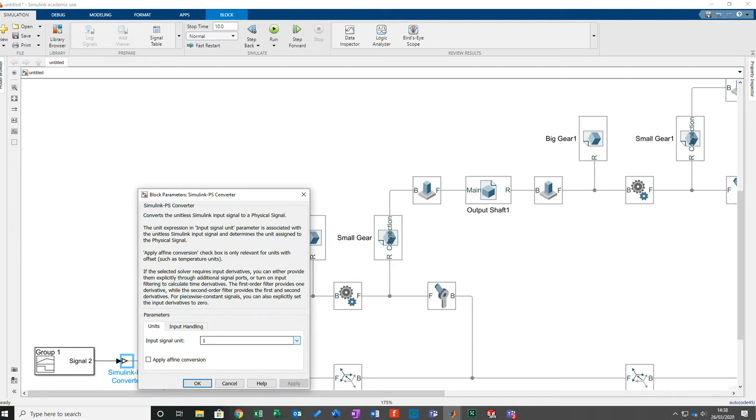So if I just add one in, I'm going to right click here. I don't want this one, delete that. This allows me now to just choose a value. So we're going to go Newton meters. It's going to be quite a whopper. I'm going to push my Y up to 2 Newton meters, which is quite a bit bigger. Bring that across into here. It might be too big for what we're going to do, but we'll run it and see how we go.

So if you run it at 2 Newton meters, you should find that the gearbox runs nicely. I'll just bring you back in to show you what I mean. Gearbox is running nicely, we're getting this nice, consistent, solid thing going on. I've now removed that joint positional movement. So if I come back into my torque outputs...

Wow, this chalky chunkiness all over it. That is not good. That's producing, because that is still implying it's coming out of the actual joint itself. So let's have a look down here.

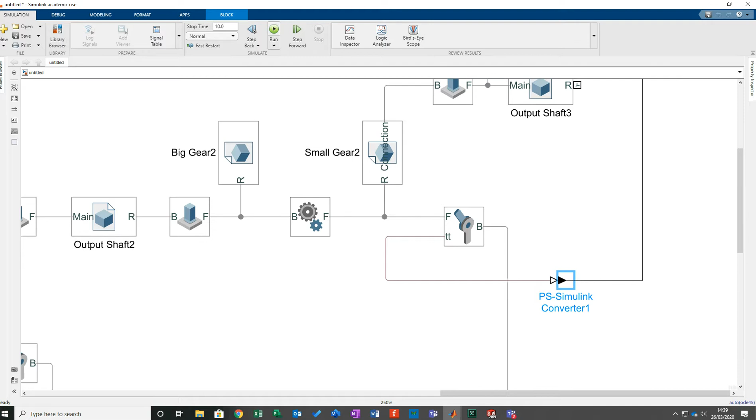Bring that out at Newton meters. It shouldn't change much, but at least it'll put it into something realistic of what we're looking at. So you look at that. Under this state, obviously we need to take a look at that as to where that's coming from. I still suspect this is coming from its resolution.

I don't know what he's just said, but I'll find out afterwards.

This is still suggesting that it's quite chunky. It needs further tidying up, really does. But look at that build - we're talking around 35, almost 40 Newton meters based on that level of damping.

So if this was running at a standard, because if I remember, we weren't going massive, were we? But at the same time you should keep in mind the gearbox is quite small. I mean, 2 Newton meters of this gearbox - let's just have a quick look at how big this actually is. So if we just take this shaft, this housing to this housing, it's actually about 70 millimeters.

Yeah, we're probably running it a little bit quick, so I'm going to just slow that down a little bit. Let's just take it a bit, let's take it down a little bit. So I'm going to go 0.2, because that was just crazy - it was practically exploding.

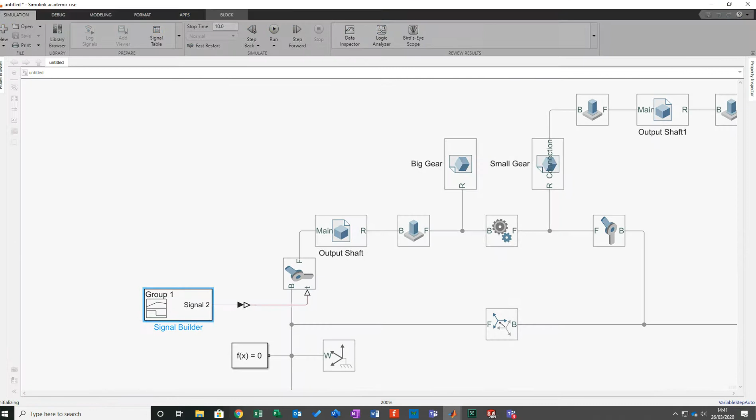Let's have a look. Yeah, so it's speeding up, so it's damped, it responds to it. We've got, if we look into here, these key points - torque starting to emerge, it's resisting against the torque. You can see where it's almost smoothing out particular points, and then we do need to tidy it out because that's very irritating. But then it does.

I mean, it does still come in quite high - you look at that, this is at Newton meters, 35.35. It is quite high, and that pushes it out to around 4,500 RPM.

Still not convinced it would run at that speed. So if we wanted to actually achieve... I really entertain myself with this, clearly. If we wanted to actually achieve that level of speed at this particular rate, and we were after 0.2 Newtons to come out, to actually get it, we would have to run it at something to overcome the level of damping to get it to - we'd have to run it at around 4,500. That's why this isn't the assignment, by the way.

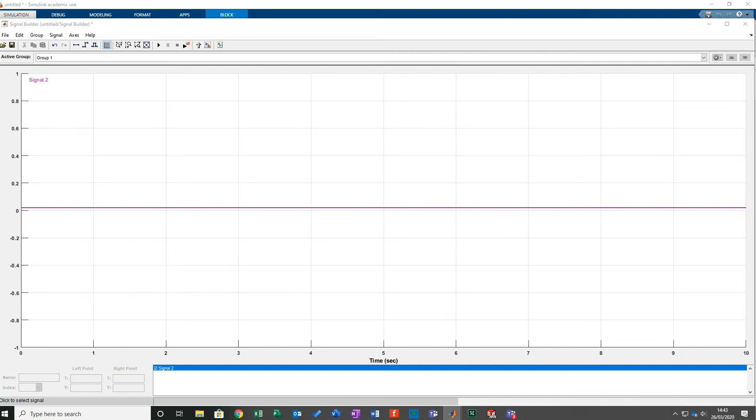Yeah, so it's not the ideal, what we're looking for. But right, so if I just take it back a little bit, I'm just going to make it a bit more serious, and let's just drop it right back. So if I just slow this down, because I'm hoping this will give people an insight in just a second - if I slow this down, and make it something a bit more realistic. Now you look at what we're initially looking at - these are the two particular torques that's responding around that gear shaft itself. So the smoothing I was talking about, that overcoming of the damping.

So my question is, and the question that comes out on the assignment is, if someone's complaining of a particular noise that's coming out of it, what could one of the possible reasons be? Where would this be actually making a noise if it was coming from somewhere? The reason I wanted to run so quick is, in essence, really thinking about what we've done here is the answer to that gearbox. Why they put out the gearbox, Ducati looked at it, sent it back and said it works fine. Because technically, if you look at our gearbox, it does work fine. But what's the one thing that could work on this?

The truth of it is the damping - it's the material it interfaces with. I mean, don't forget, we did make these out of steel.

But what if it runs up, and what if the way that it's restricting is beginning to cause resonance? If you're getting a resonance at a certain level of operation, the question is, would you get some type of noise, some type of knocking? Is there some type of hard evidence that you could pull out of it? And if you build that gearbox right, the answer is yes, there is. Finding it is very tricky though, and getting that gearbox built is also very tricky.

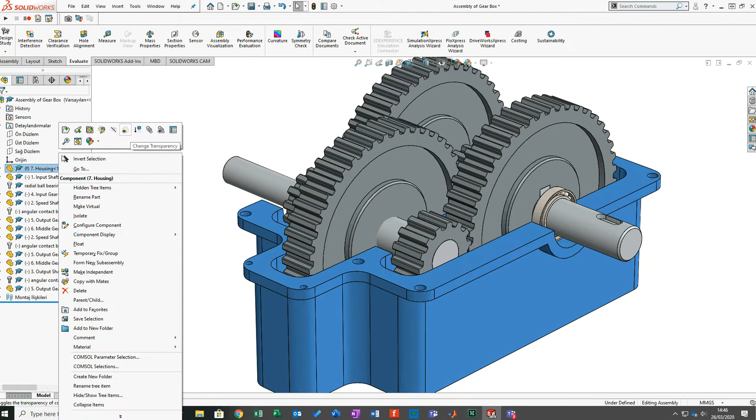The gearbox, as I've said, has got something like 150 parts on it. You don't need them all. This was a simplified version of that process, so we knew we didn't want that, we knew we didn't want these. All that we needed are the key players that interface within it, and that is just to know where these sit.

If you're lucky enough to have any type of measurement or a CAD system, you don't actually have to use SolidWorks to measure. I just wanted to show this, who mentioned it? Damien, you were saying earlier about how they look to be interfacing, and it's just because of the way I've imported them, using how they were originally drawn. If I just shift this, it will interface nicely. So it's just to show you that's where it's come from.

Yeah, so is there any questions on this? As I've said, I will stop this recording and encode this, and I will upload this model example to Blackboard. You're more than welcome to rip it in bits, take a look at it, see what you think.

You can tell you're getting addicted. You can always tell when somebody's getting addicted.

Now it's a cracking question, so I'm just going to read it just because then it's recorded. How do you combine ANSYS and Simscape Multibody? Now, personally, I've always had a major issue with trying to combine ANSYS and Simscape Multibody.

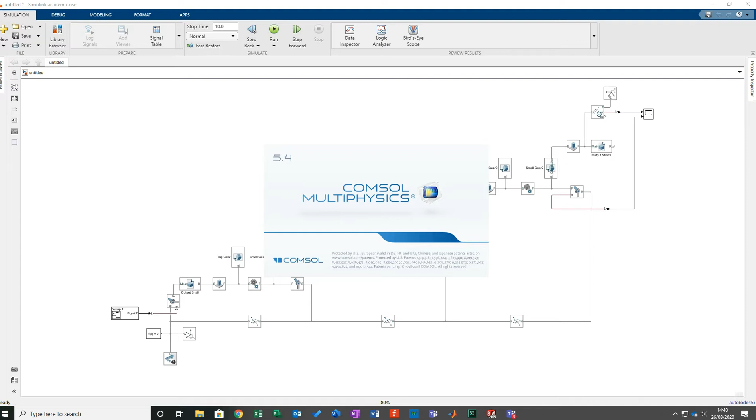Now, I'm just going to quickly show you this software, Damien, and everybody - this software is COMSOL Multiphysics. COMSOL Multiphysics is a sister company to MATLAB itself. This software will directly interface with it. If you're referring to what my PhD work was about, my overall dynamic construction sat here, and then what I was able to do is interface it directly with COMSOL Multiphysics.

The trouble is once you get into MATLAB, it's like a downward spiral. MATLAB File Exchange - this is an online community, this is like a MATLAB nerd site. It is awesome, absolutely awesome. A lot of people, what they essentially do is, if somebody doesn't like something about MATLAB, you've got a lot of people on here who actually just make tools. They just think, 'oh, that'd be cool,' and they just make it. And there is some rocking people on here, there really is - some great insights to certain stuff.

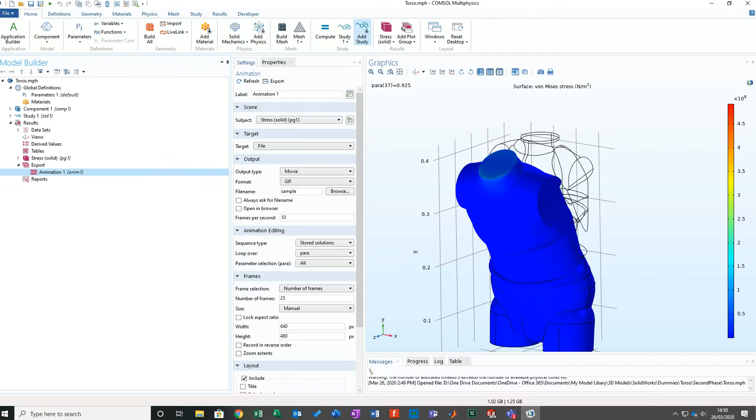If you're interested about the aircraft design community, you can join these communities, and you've got people doing crazy stuff. This is essentially what got me into data acquisition and looking at how I could do it, and then what in essence got me onto this. So this is one bit of work that I'm doing at the minute, but this actually shows we've been fascinated with studying the human body and studying how it can do what it can do. Because we've been doing the exoskeleton work, we needed a way to be able to simulate the human body being deformed. So all we've been trying to do at the minute is basically get a human's torso to move as we want it to.

Now, what we've been able to do with this is take it and then transfer this directly into MATLAB, apply the exoskeleton straight to it. When it loads, it's a big model - it's partly made of skin and solid structures. So when it moves, that's what we get. So we were just trying to look at the sitting up process, and what you'll see is it's even got a spare tire.

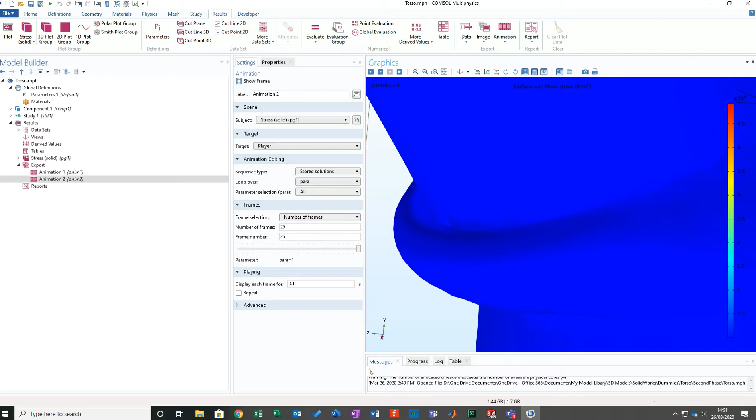It's a great bit of kit. Right, so on to the next.

Yes, if you email me outside of here, I can probably help you with that. There are a lot of contacts about that. So yeah, it's not free. It is, it's quite a pricey bit of kit, and at the minute COMSOL isn't really used by industry.

Now this is purely because it is heavily physics based. So if you look at this, for example, if I just extend and show you how I've constructed this model, this area here is actually made of silicone, and this came from genuine testing.

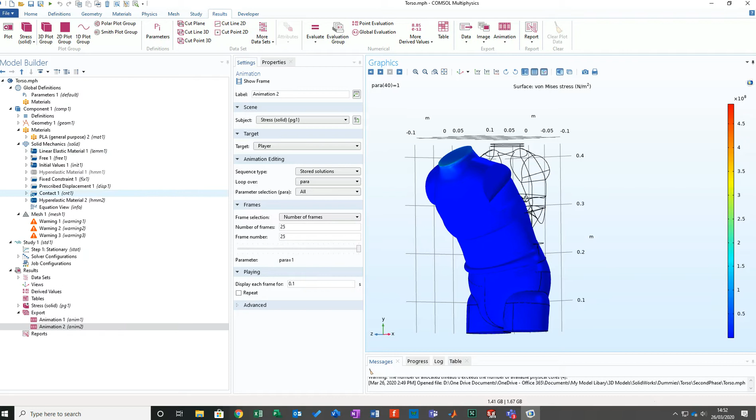Now, the only way I could do that is if on my model construction, where I've got hyperelastic materials, to explain how the material will deform, and then I'm actually using what is known as the Mooney method for hyperelasticity.

So you write in the equation where I've got solid, it refers to the solid structures themselves and how they deform. So in essence, what I'm actually doing is using volumetric strain, but actually writing in where that volumetric strain is applied within the model.

It's an awesome bit of kit. However, industry is not the biggest fan because it moves away from quick answer results, and it really stays with the hard physics behind it. But all my PhD was in this, and hence why I use this. So I hope that answers the question for you.